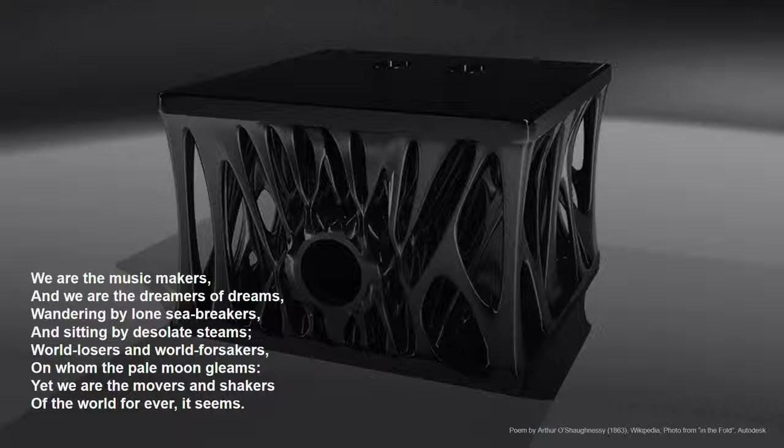Boom. And there was the quote that I like, okay? At the very end there. And people really don't know that there's an actual poem that's from. It's a poem from 1863. We are the music makers and we are the dreamers of dreams, wandering by lone sea breakers and sitting by desolate streams, world losers and world forsakers on whom the pale moon gleams, yet we are the movers and shakers of the world forever it seems. So I like to think of us as the movers and shakers of dreaming up designs and making designs for our companies or for our personal lives.

So moving from that, everybody's here for generative design, right? So what is generative design? If you just think about it, nature has been perfecting and adapting design for millions of years.

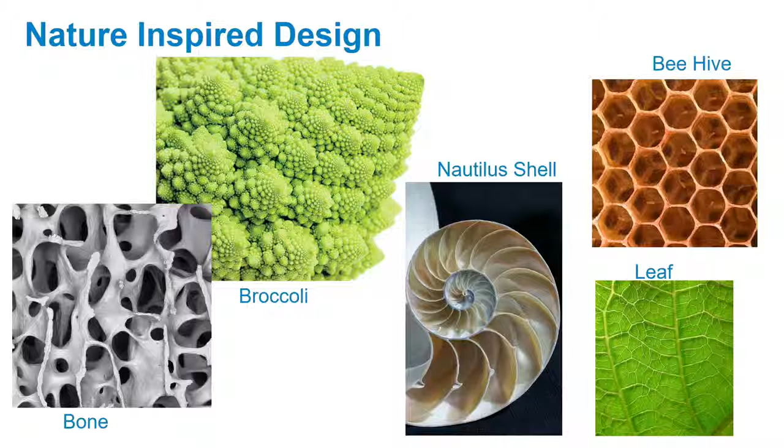So we can dream it. What if we could reference nature for the basis of our design? Generative design mimics nature's evolutionary approach to design. It's designed with a purpose. Just like nature has a purpose to build their items, we have a purpose to design and build. Next will come a little video that Autodesk put out last year, but we can take a look at it.

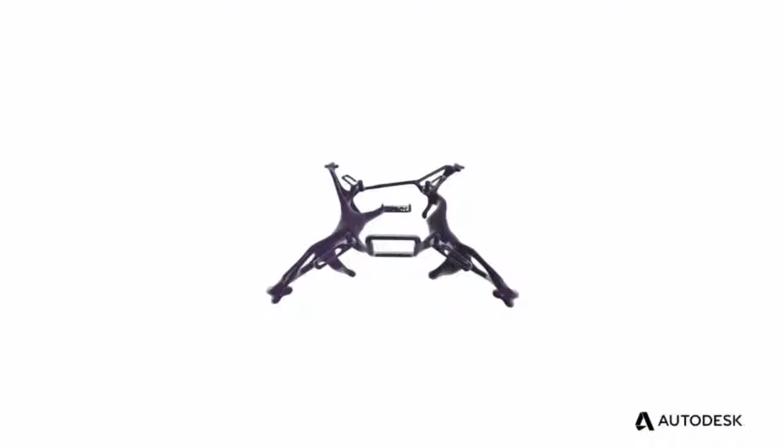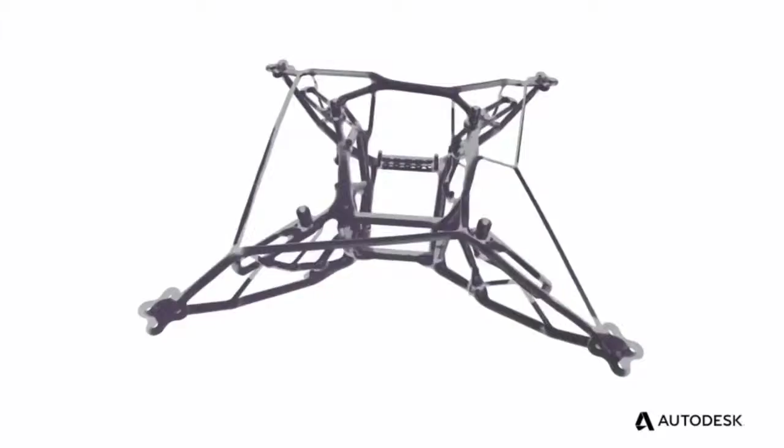What if you could come up with thousands of options for a single design without drawing, all of which meet specific goals set by the designer? And from those options, pick the one design that delivers on the most important criteria, the design you couldn't possibly have imagined. This is generative design, a technology that harnesses massive computing power, creating forms with precise amounts of material only where needed, achieving maximum performance while wasting nothing.

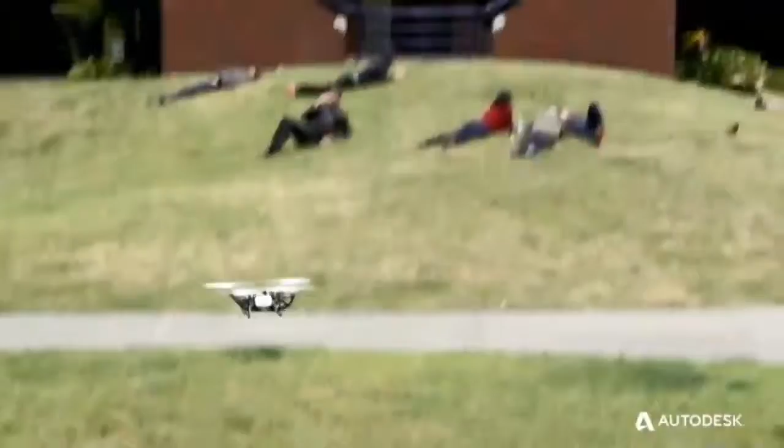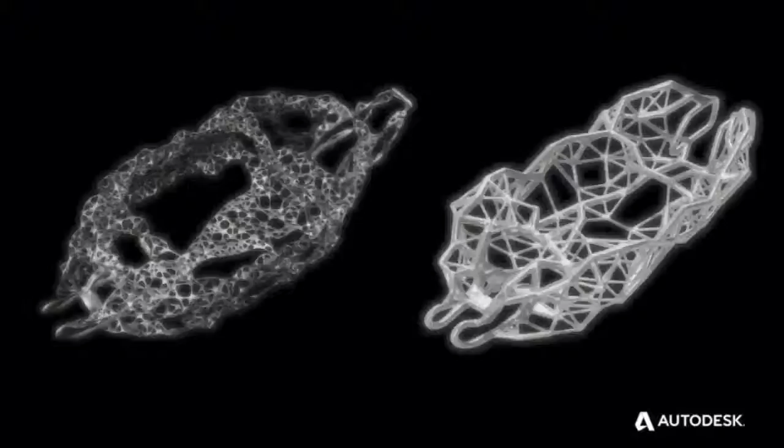But generative design can be about much more than simply turning out alternatives. Prototypes can be scanned and equipped with sensors that provide real-time performance data that can be looped back into the design process, so the object, in effect, co-designs itself. And depending on the material and method of manufacture chosen, the software can optimize the design for those choices. In its search for the optimal design, generative design creates complex forms that would otherwise be impossible to make using traditional manufacturing methods. Now with advancements in material science and the ability of 3D printers to print metal, companies like Airbus can create forms like this airplane partition panel that's half as light and just as strong. The result? Significant reduction in fuel costs and CO2 emissions.

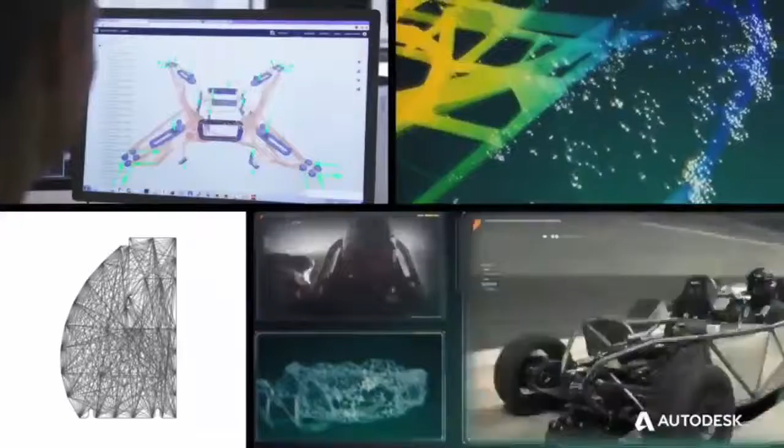The things that have limited us in the past, software, materials, manufacturing, no longer do so. With generative design, the world can look and perform any way we want it to. This is the next stage in the evolution of design, and it's happening now.

Now, when you look at that video and you hear it, it says half as light but just as strong, or it could even be stronger, just like bone material. We saw the bone structure close up there. It's really light, but yet it's really, really strong. Generative design is going to help us optimize and create designs that we can only dream about. A human being couldn't design that, but with nature's approach, with their algorithms, we can create designs that we can only dream about.

So everybody's here now for an instructional demo. I'm going to show you how easy it is, how simple it is to start your project, get some models in there, and then generate and create some outcomes. So we're going to get started with it. We're going to do the demo. We're going to load projects and models into the software. We're going to set loads and constraints. We're going to set objectives and see how simple it is, and we want you to use it and then give us some feedback about it.

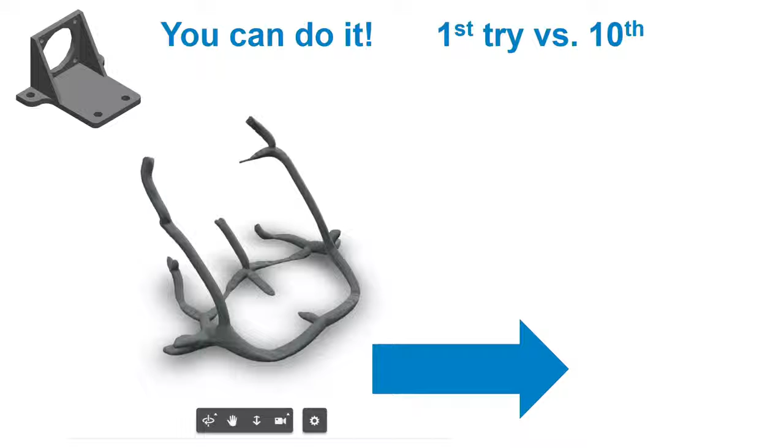So when I was starting out, I started with this bracket, NEMA bracket here, little motor bracket. And my first try putting this object into generative design, I get something like this. Don't laugh. Okay? Can I use that in production? I don't think so. It looks something like weird antlers or something. But I learned about the software. I tried more and more, and I got something on my 10th try that I could actually use. So going from the NEMA bracket up here down to something like this, if I created that in steel, I could get something just as strong, but half the material. Actually, it's more than half the material gone, and the weight also is down to about 30%.

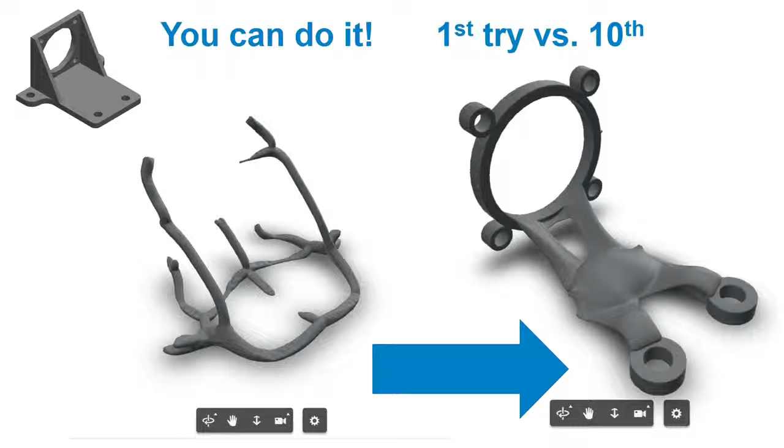So starting with Autodesk Generative Design, and if I say AGD, it's going to be a little bit simpler instead of saying Autodesk Generative Design all the time. All right, so just remember that, okay? So we're going to start the generative design, we're going to log into our account, and then select the hub and click our new project. So with that, we'll start the software. We're going to log in.

Okay. Now we're in the tool. Now we're going to go up to our profile button, and you can see that there's different hubs that you can select from. Different teams. Okay.

Now if I go over here to the new projects button, I can see the different generations I've done in that hub. Or I could go over here and switch hubs again and then see what I have in the other one. So you could create different projects for different teams, different hubs there. Okay, and you click the new project button and you're ready to go.

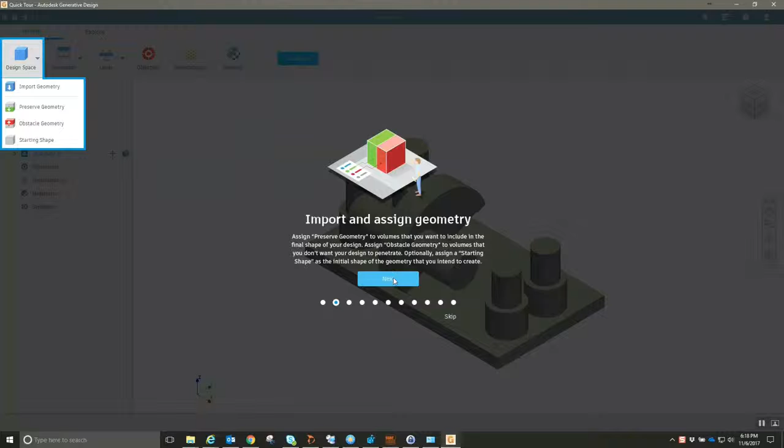Now with generative design, there is a user interface and workflow. And Autodesk recently in the Tech Preview 5 just put a new starting video in here to help you out. So once you first start it, it'll show you exactly what workflow you have to go through to get your generations and outcomes and see what you can do to filter and explore at the very end. Nice little addition they put in there.

Okay. There's a user interface, so there's right-click menus. There's different key combinations: control left click will add to selection, shift middle mouse rotates and control middle mouse will zoom. So it's really similar to CAD programs you have already, and it's pretty familiar. And you can also do the quick tour button if you ever have to look at it again. There's a quick tour button in the question mark icon top right.

There's also preferences in generative design. There's global unit preferences and project unit preferences. And the project units will only show up if you have a project started. So if you start the tool and you look in there, it's only going to show the global units. And the project units have priority over the global units.

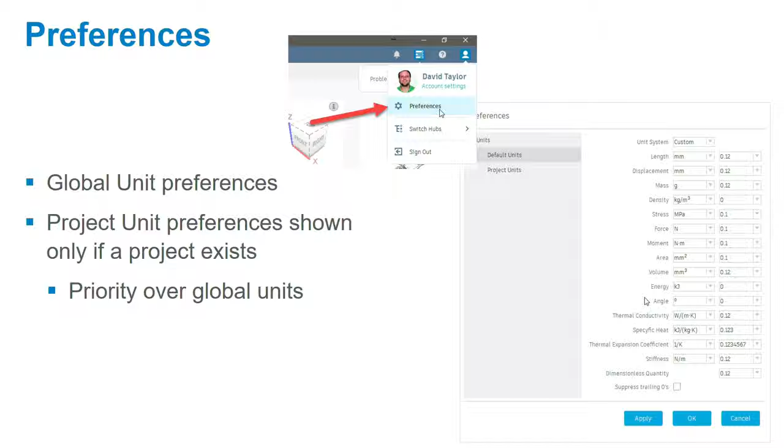And there's a clear workflow. So if you watch the video, there's a clear workflow from left to right, from importing your geometry and setting loads and constraints and objectives, then generating it. So here's the tool, and you can actually see some of the buttons and the workflow. All the way to generate.

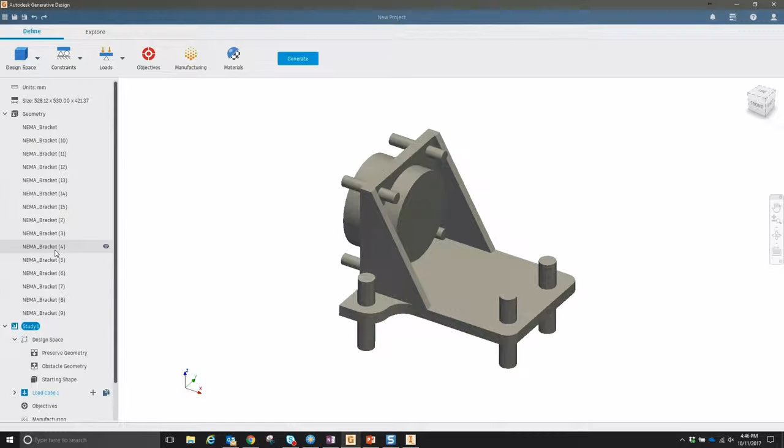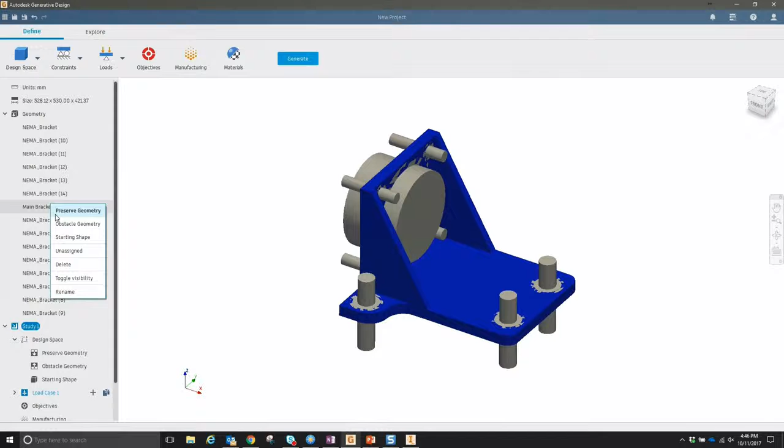And on the left-hand side, there's like a browser tree where you can look at all the parts that you have. You can select the parts. You can click on a little eyeball to toggle visibility. You can right-click also, like I said, the right-click menus to assign or toggle visibilities. You can also rename the imported CAD objects so that you know what they are. And there's the assigns. Okay.

Now there's a clear structure within AGD, the file structure here. You start out with the hub. Like I said, you could switch hubs or teams. And within that hub, there's a project. So you start out with a project, and then you assign a study and loads and objectives within that study. So just like here on the browser tree, just broken down here.

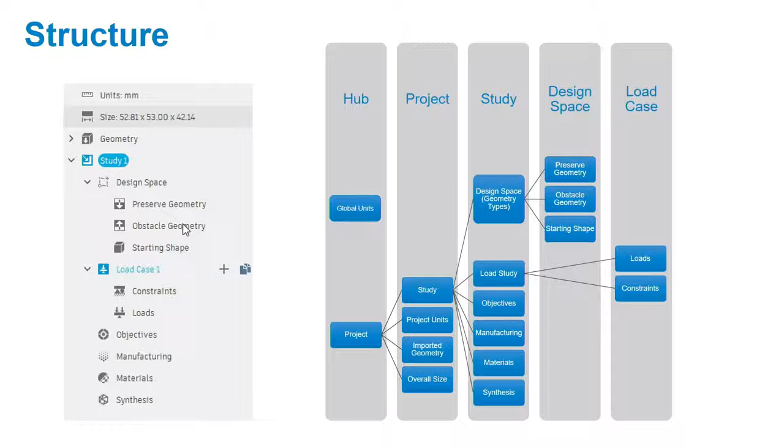Okay. So our first task in the AGD software is importing and assigning geometry. We need something to start out with. We can't just say, hey, push the button and create something, because it doesn't know what to do. So we have to import geometry. The supported formats for import are your mesh and standard formats, like your SAT files, your IGES files, STEP, STL files. I think they're the most used, maybe OBJ.

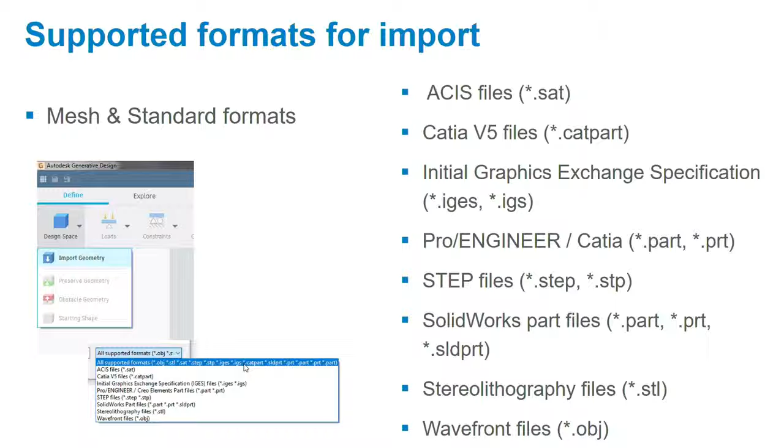And since I was using Inventor for a lot of exporting and importing these meshes into AGD, I found some key things: if you're using IGES or STEP or SAT files, when you export from Inventor, it won't include the mesh features. So you have to, in Inventor, create a solid body using like a Mesh Enabler add-in or something else. You've got to have that solid body to export from Inventor.

And then with the SATs, it will treat the bodies as one entity. So if you have multiple parts in your assembly, it will just come in as one singular part. It won't let you select different parts, different bodies. And with OBJ and STLs, when you export from Inventor and import into AGD, it won't show you the little geometries that are inside the other bodies. So they're just some tips that I have found from working in Inventor and with AGD.

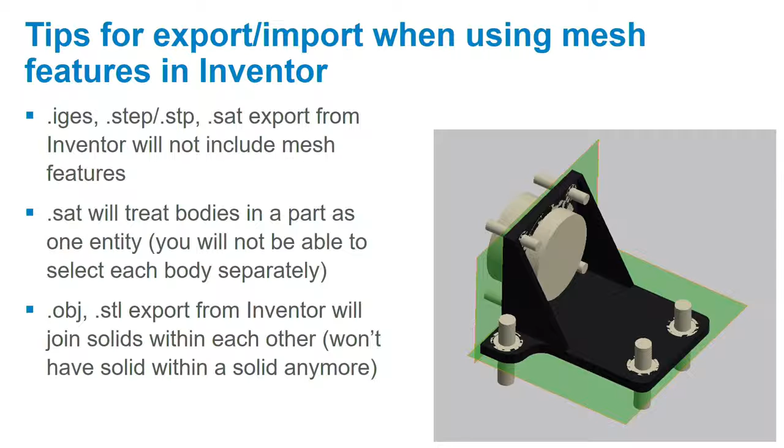So right now, it will show here how to import and what happens. So I'm going to import the motor bracket. It asks me for units. You can select the units there.

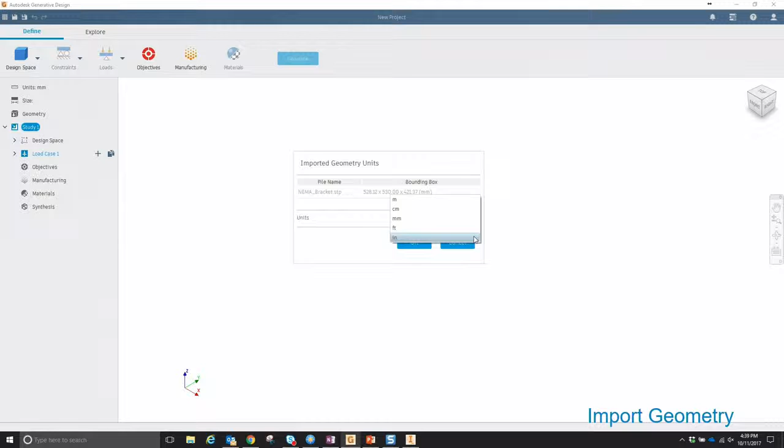And it imports as the separate bodies here from the assembly from Inventor, which I chose there. Okay. And when we're assigning geometry, it's giving instruction to the application. So it doesn't really know what to do after you put the geometry in there, so we have to assign some things to it. So with the preserved geometry, it will keep the geometry the same as what is designed. So if you select a part as preserved geometry, it will keep that for the outcome also, the same exact

shape. The obstacle geometry creates like a barrier. So you're going to have obstacles within the design that the generative design software is going to build around and butt up against, but not go through. And then we got starting shapes, which is the part or the geometry that we want generative design to modify, to build, to recreate. So there's 3 different types of geometries you can assign, and it tells the software and the algorithms what to do.

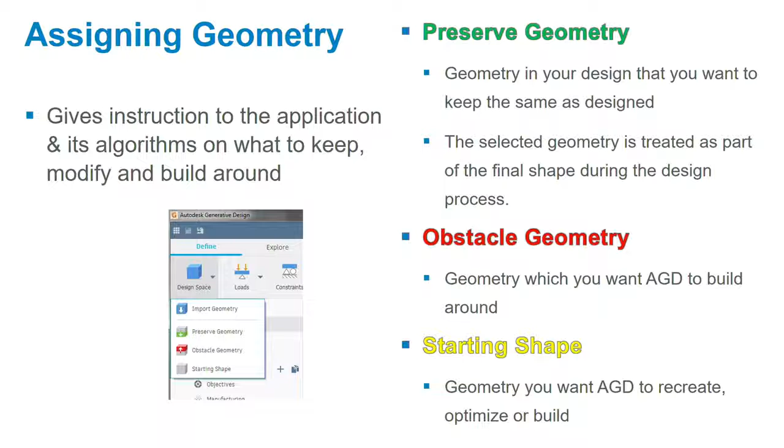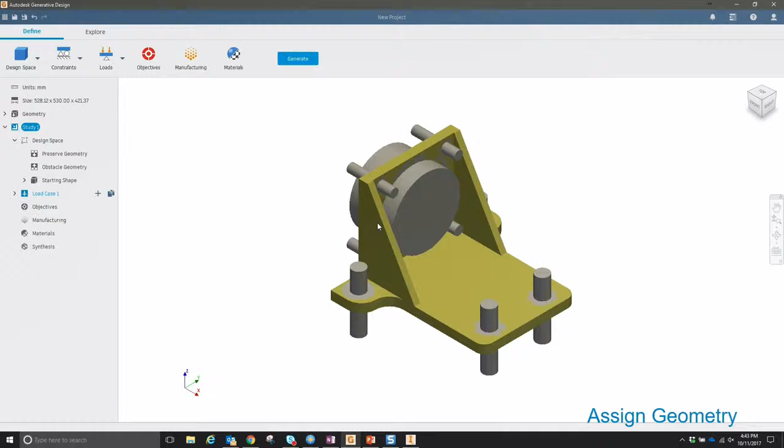So you can see here in this, we're going to assign some geometry. So we got the preserve, obstacle, and starting shape. So I'm going to assign a starting shape. I want that bracket part, that full part there, to be recreated by the software. And now I'm going to assign an obstacle geometry. So with the holes that I wanted the motor or the bolts to come through, I had to create these extra bodies. And I'm assigning those now as obstacles so that the software won't make anything through those holes.

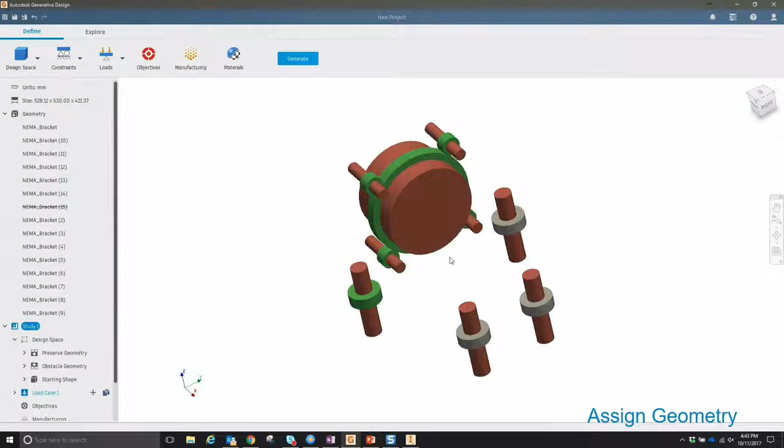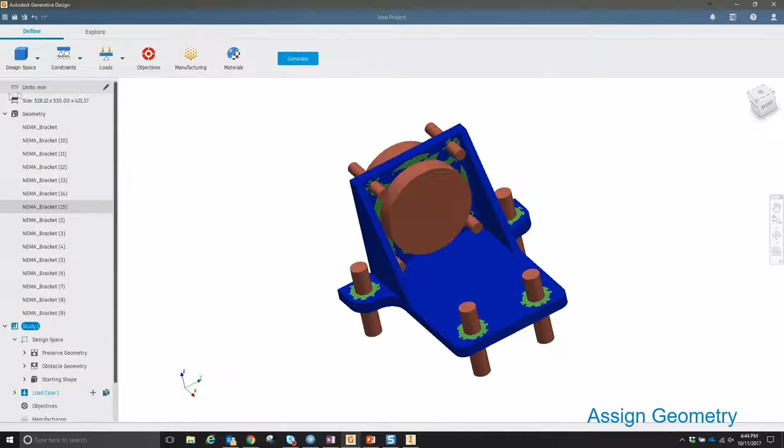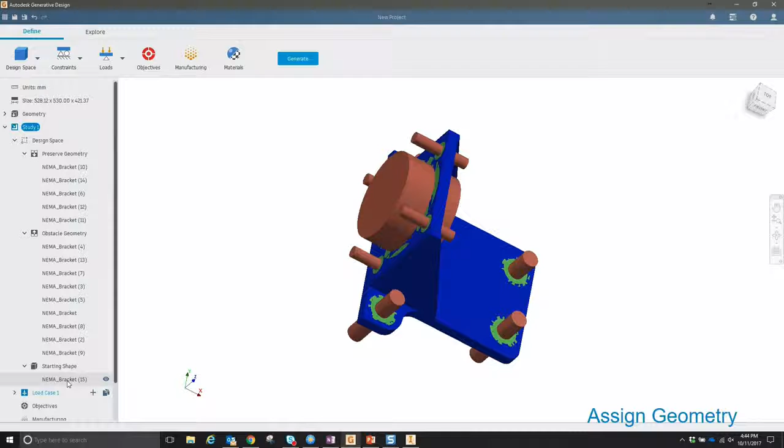And now I'm turning off that full starting shape so that I can see everything underneath and inside. And with these, I want to create the rings where the motor goes through. That's my preserved geometry, and it will actually keep those rings in my final shape. Okay, and you can see they change different colors just to denote the different types of geometry that you assigned. And over on the left-hand side, in the browser here, you can see the different geometry that's assigned to the different types.

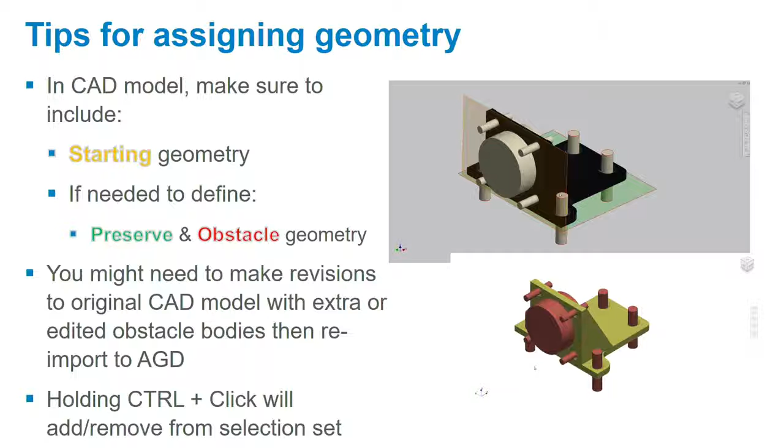Okay, some tips for assigning geometry. When you export your CAD model, you got to make sure you include your starting geometry, of course, the thing that you want AGD to recreate. And sometimes you need to define preserve and obstacle geometry from your original CAD software. So like in Inventor, I had to go and create these extra obstacle geometries and preserved geometries for the software to keep or to build around. And like I said, you might need to do some outcomes, go back, redo it in CAD, and then export and try it again. The AGD software is really quick at creating outcomes, so it's pretty simple to do. Okay.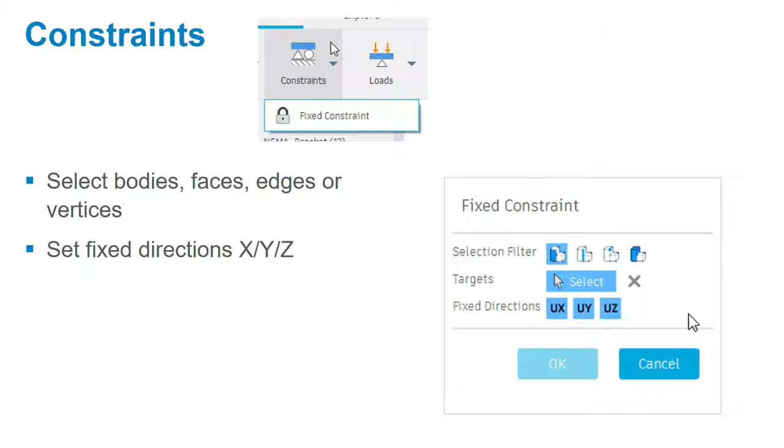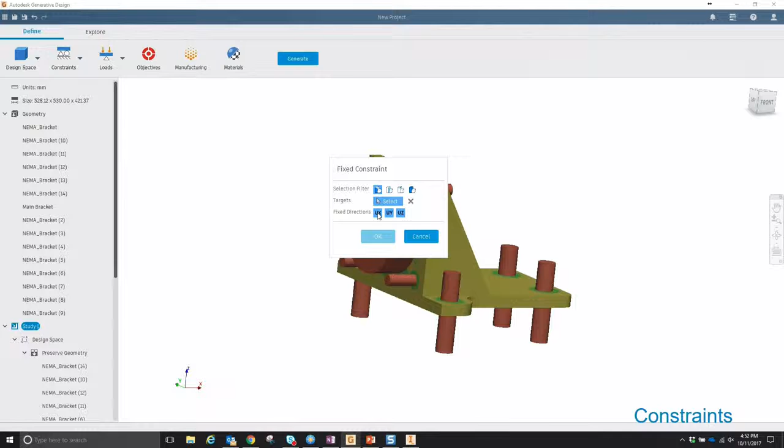So after we imported the geometry and assigned the different types, we have to set constraints up for it. And with this, we can do a fixed constraint, where we can select bodies, faces, edges, or vertices. And we can set fixed directions of X, Y, Z if we wanted to. We can click those off and on if we want. And here you can see I'm going to assign a constraint. And there's all the different types of constraints you can assign to the different bodies. And I'll select the body. And now I actually set the constraint around the motor, because I wanted that to stay where it was, and also on the bolt holes.

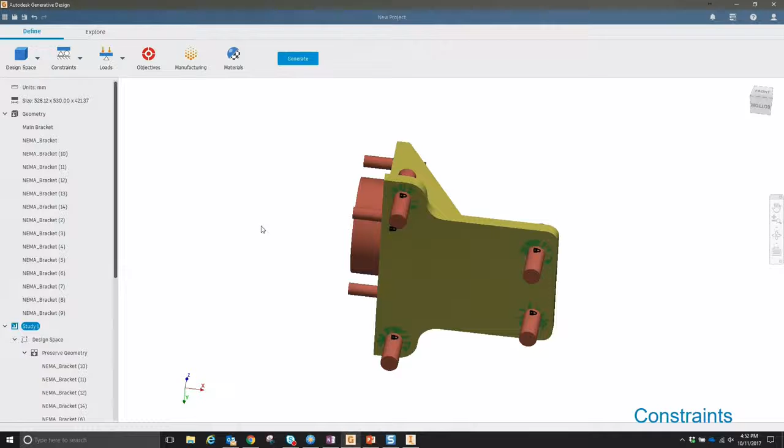Okay. So after we have constraints, we need to set up loads because we go through our workflow left to right. So we go constraints, now loads. And there are three different load types. There's a pressure load, a force load, and a moment load. So I like to think of these as squeeze, push, and twist. Okay. And we can apply these to selected entities. So depending on the load being used, you can set them to faces, edges, vertices, or

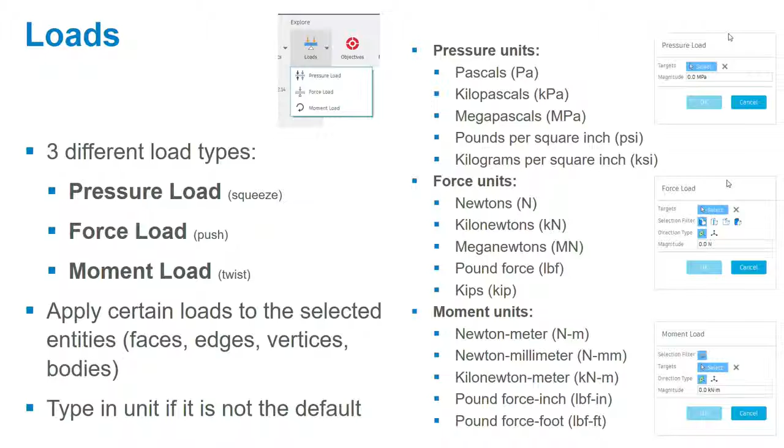bodies. And also, with the project units and the global units, if you can see in these little boxes over here, if it comes up as newtons or pound force, you can actually type in the different type of unit in there. Just type it in manually, and it will convert it automatically for you. So right now I'm going to set a load. I'm going to do my force load.

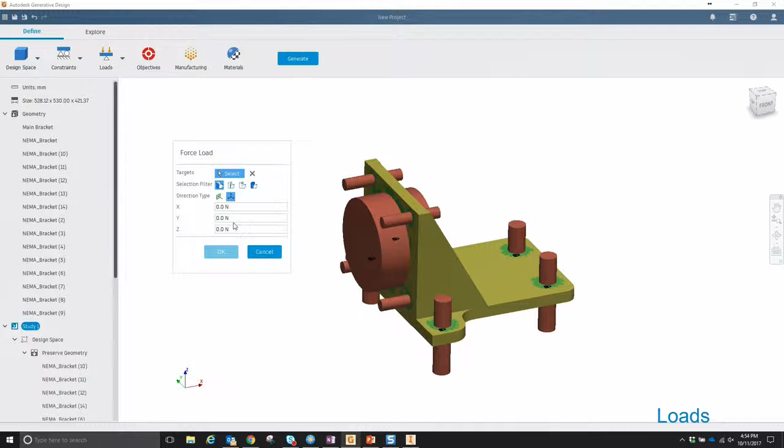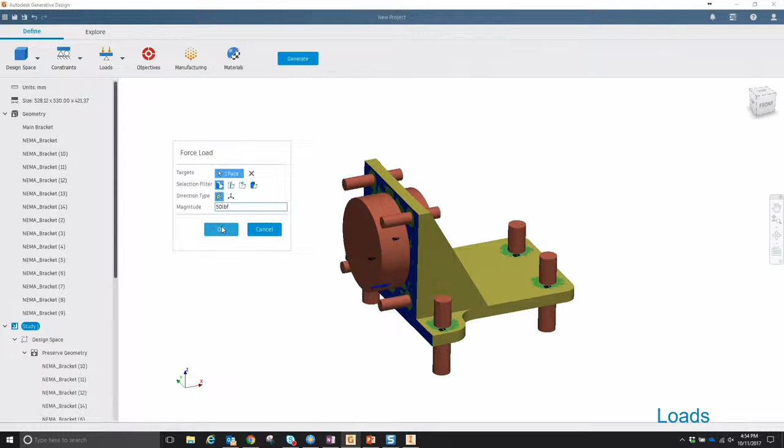Left click is just to select it, then you can do control click to add or remove. For these? Oh, yeah. It would be face, edge, vertex, or body. Yeah. And you can see I actually put in pound-force, LBF, instead of newtons, so I didn't need to convert it. I just typed it in and it did it for me. So I'm going to now add a force onto this bottom part here.

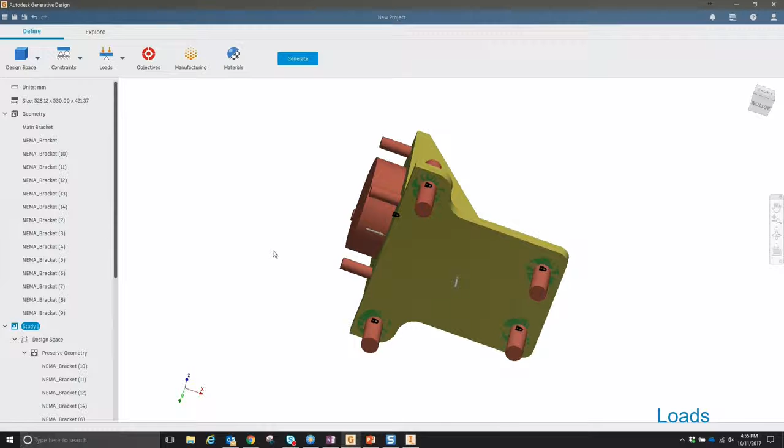Okay, now I've got my loads on there. So now I've got my geometry, my constraints, my loads, and you can see that the loads show up here in the browser also. So as we work this way, it's also building everything on the left-hand side here. So there's multiple ways of doing this, as you can see as you work with the tool.

Now we've got objectives, the next button over. Objectives are the thing that you want to achieve from your design. You've got minimize mass. With that, you can specify your safety factors, and it will make it the lightest weight possible within that range. You can also set a mass target. So that's like I want it 30% difference from my original design. I can set that, and it will go within the safety factor that you create.

And then also you can maximize stiffness. So you specify the safety factor, and it gives an optimum rigidity to weight ratio. And with maximize stiffness, you can actually create another objective too. So you can have two different ones going at the same time.

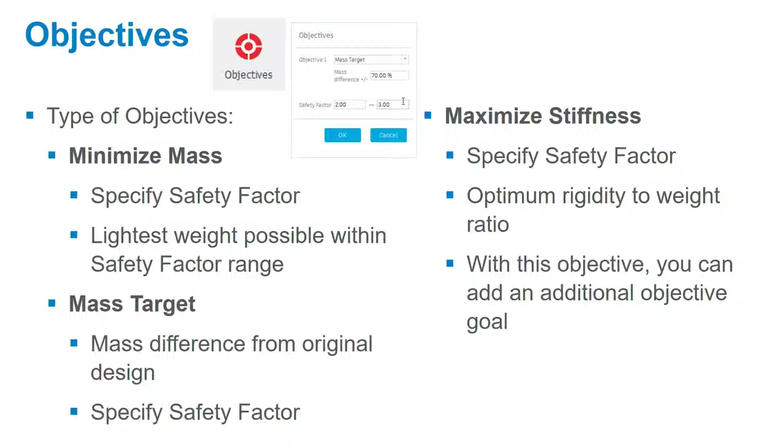Okay. Now, next button over would be manufacturing. Manufacturing is the way that the object is going to be created. So you can do unrestricted, which means any type of manufacturing: 3D printing, casting, whatever you want. Then there's an additive selection also. So if I just want additive manufacturing, I'll click on that and say I want to do a 3D printed object, and it will actually optimize the design for additive manufacturing.

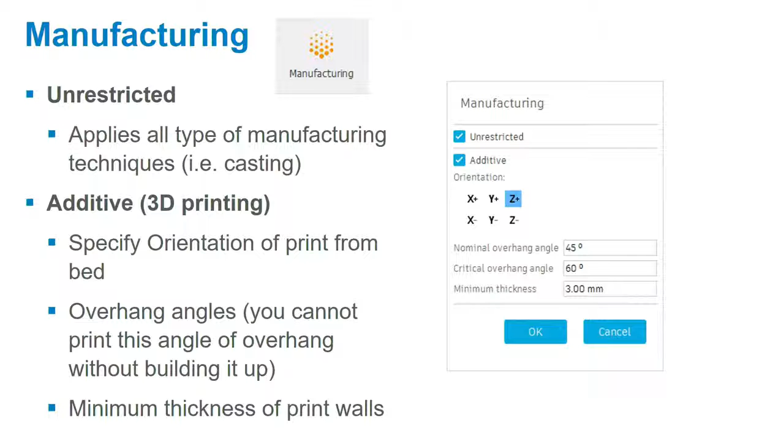Next one over is materials. With materials, you can select a maximum of 5 materials. There's a materials box that pops up when you click the button, and if there's a little red dot there, you can download more. Every week or every couple weeks, more are added to the software, so it's pretty quick. And you can click on each material and see its specifications, so if you don't know the strengths or the weights, you can look at that.

And one note too, custom materials cannot be added yet, right? Not yet. Okay. A lot of people ask for that, but we'll see.

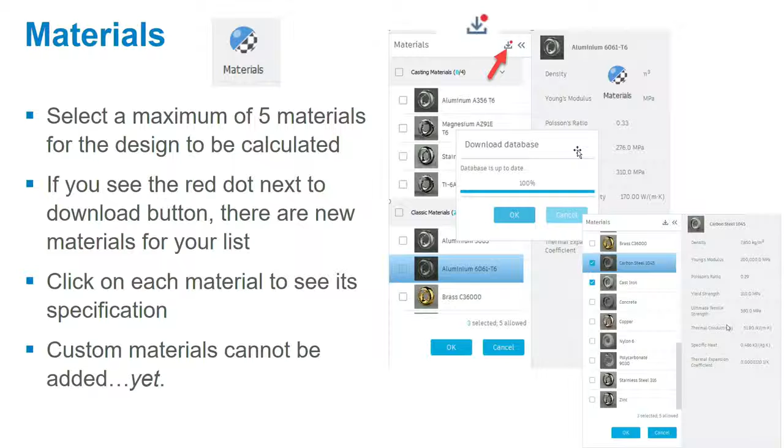So here's the material box, and you can see I'm now downloading new materials from the cloud. It's adding them directly to the pop-up. Then I can select those too if I wanted to. So it's as simple as that. Really quick and easy. And I'm just scrolling down through all the materials that we have available within AGD to use.

Okay. Now there's a part at the bottom of the browser tree called synthesis, which is about what topology you have at the end of your outcomes. It gives you 3 options. You can have a coarse topology, which reduces generation time and gives you a quick outcome, but it's the least accurate, just like a draft. Then there's a normal selection, which optimizes the outcomes along the spectrum. And accurate is the best quality and desired for manufacturing.

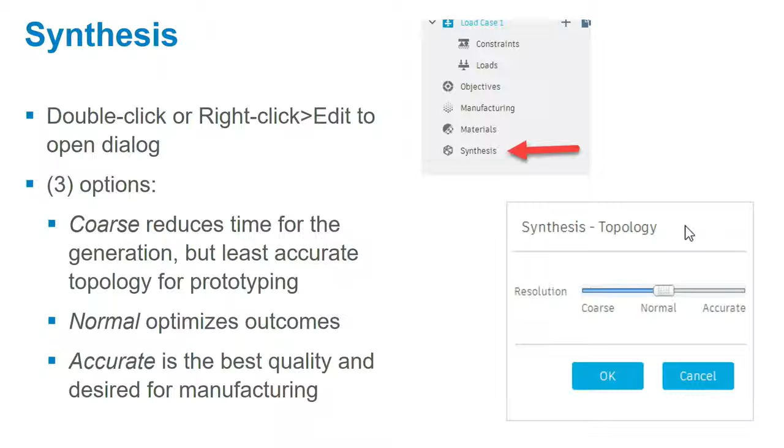Once you hit generate, it will show you a number of outcomes. If you have a lot, I would go with coarse just to see how quick it goes and see what you get on the output. Once you have something you want to use, then you can go with accurate. And once we have those set up, we can go ahead and generate the job.

With generation, the data is checked first, and errors get shown. If you have a little red icon next to an item on the browser tree, you have to go fix that, whether a load is off or a constraint is off. You can roll over the icon and it will tell you what's wrong. And once you hit the generate button, any cloud or other messages are returned in another little pop-up button there.

Next to the pop-up button, there's a little status icon that gives you the generation status: uploading the file, going through it, and you can also cancel if you need to stop something and go back and resend it.

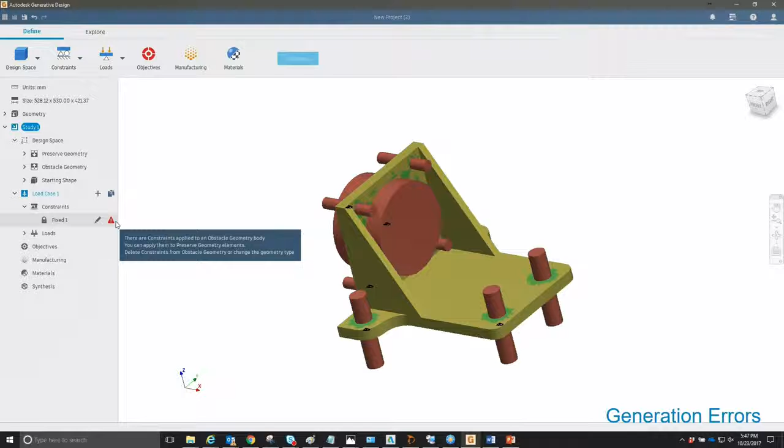So you can see here, I'm going to try generating something. It checked, and now I have a little red icon there, so I needed to fix something, and it tells me exactly what. My first couple runs, I had a bunch of these because I didn't set things up right, so I was trying to work things out and get it clean.

If your data and specifications are good, the pop-up comes up looking something like this, telling you how many outcomes you're going to have. The more materials and manufacturing constraints you add, and the synthesis resolution, determine the outcome number. After you click generate and hit continue, it uploads your study data to the AGD cloud, and then the magic begins.

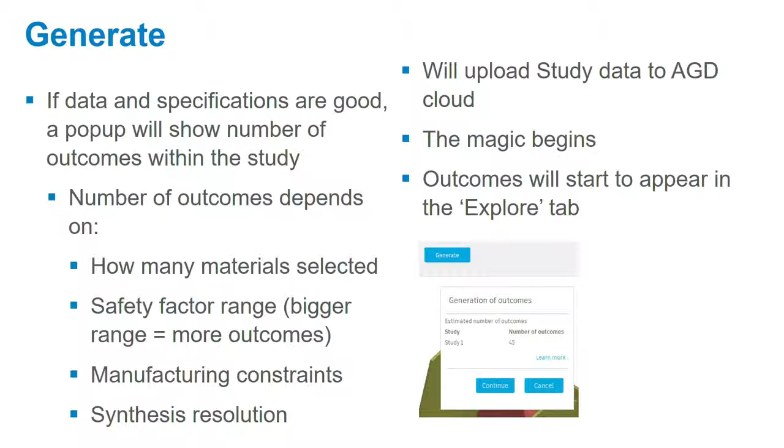So you can see here there's a clean generation. Once I hit generate, it comes up with the pop-up window, and it tells me how many outcomes I have right away. I hit continue, and now it's starting to upload and generate my designs.

Can you explain when you had to put a body constraint on the part of the geometry that you didn't want to have changed at all? Yeah, so like the hole where it was bolted in, I didn't want those to move, and I wanted to keep them as the same pattern, pretty much. So I put constraints on those so the software wouldn't move those around. So even though they're identified as don't move them, they're just like the geometry stuff with constraints. Yeah.

And here you can see now that the outcomes start to pop up in your Explore tab here. Okay. Now, some results after that. We have outcome filters within the results. We can filter by status, we can filter by studies and objective ranges. So we can drag these around just like sliders and get our ranges for mass and volume.

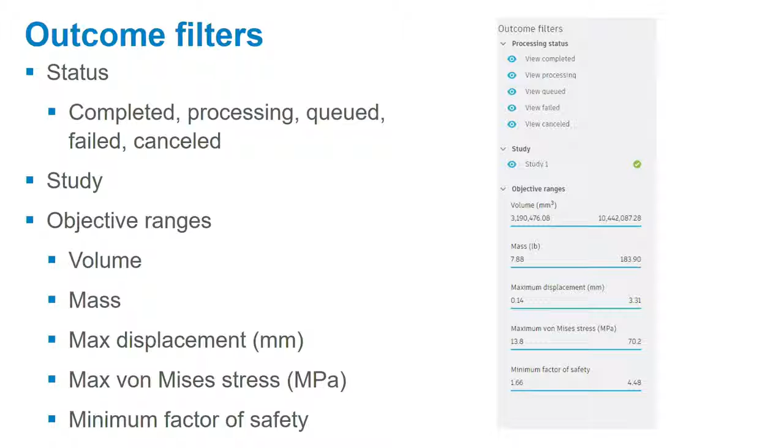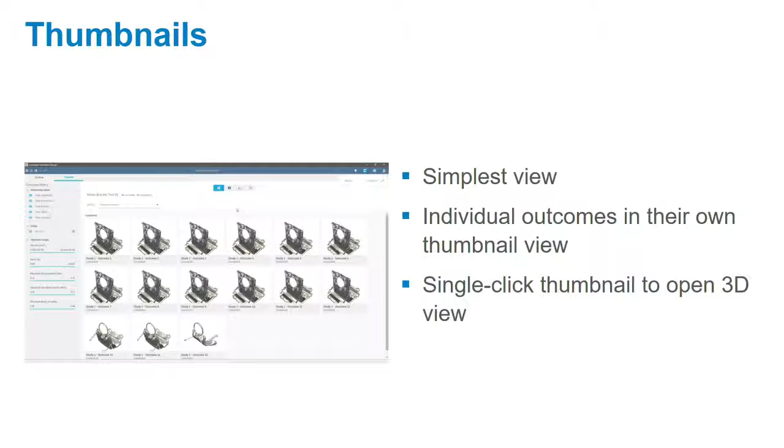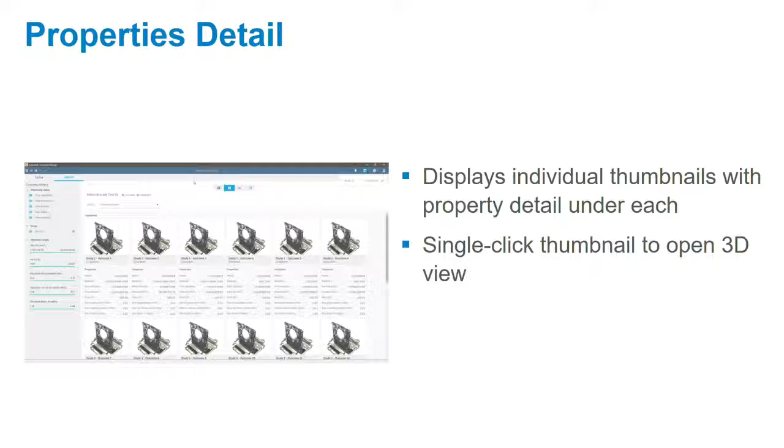And there's different types of views within the Explore tab. There's a thumbnails view, which gives you just thumbnails of all the outcomes. That's the simplest view. There's a properties view that will give you all the different types of property details underneath the thumbnails. There's a scatter plot, which is a nice view, so you can set it up by status, whether it's done or not, or you can set up different criteria on the table, up and down, left and right, and you can see where they lie on the scatter plot. And there's also a table, so you can sort and filter out that way too.

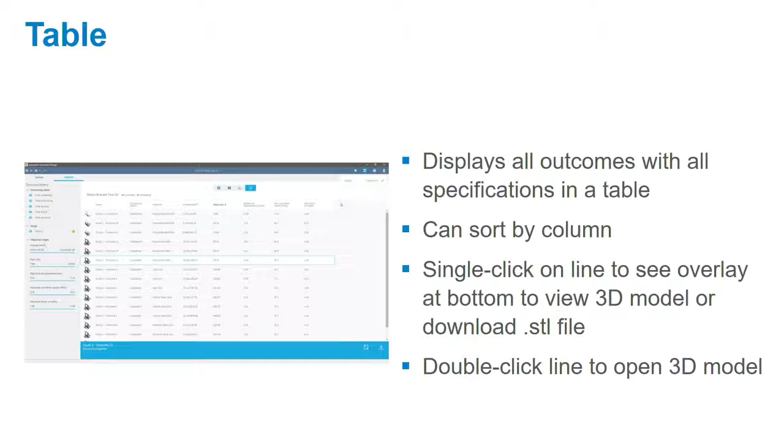So with the views then, we can see here in the Explore tab, we've got the filters on the left-hand side, and we can view by our processing status. So as it's going, we can take a look at what's done, what's still going, what's failed. And there's our drag there on the filters, that we can sort and filter that way. And we can also filter them and sort by the drop down there.

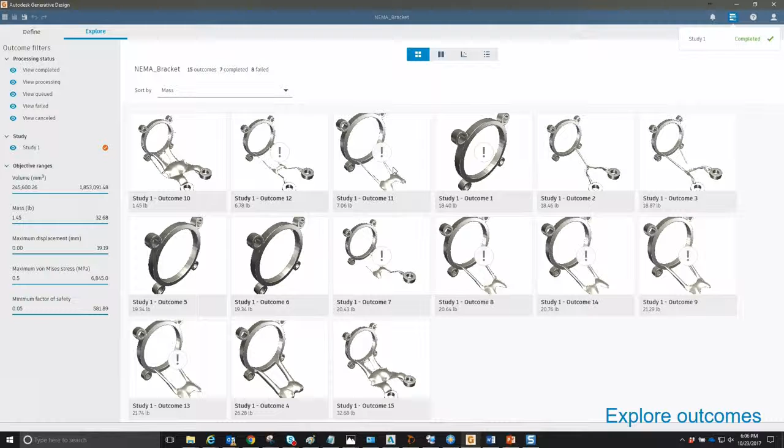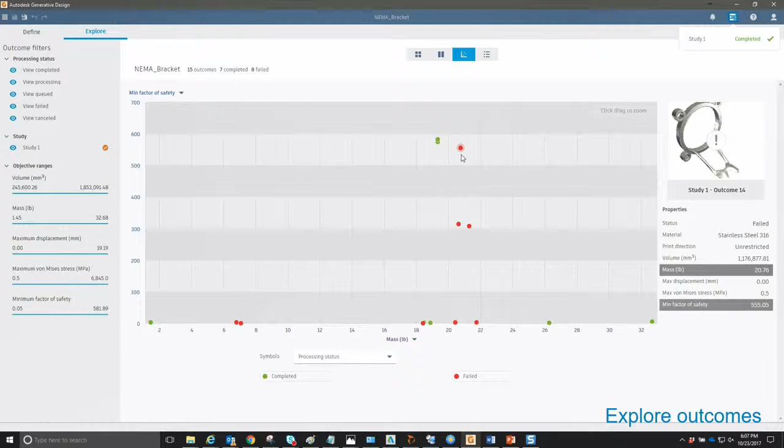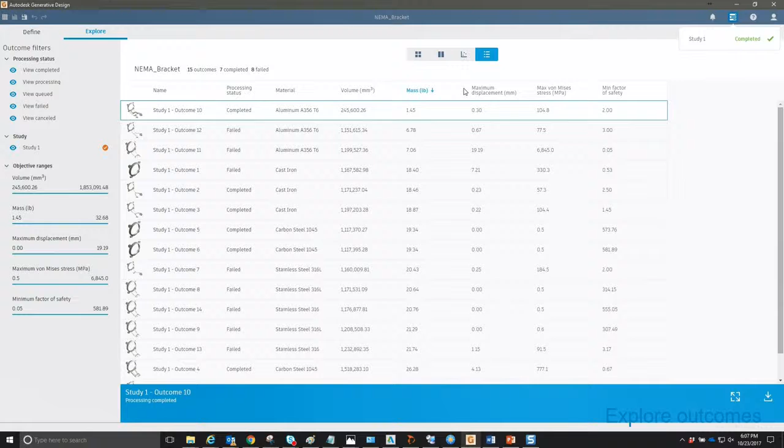And there's our icons for the different types of views. So if you click through those, there's our properties detail, and there's the details underneath. And here's our scatter plot, and as you roll over each one, it shows us the design, and also it shows us the information on the right-hand side. And once I click on one, then I can see that information. And here's our table view. Just like in an Excel sheet or other tables that you're familiar with, you can sort by the columns.

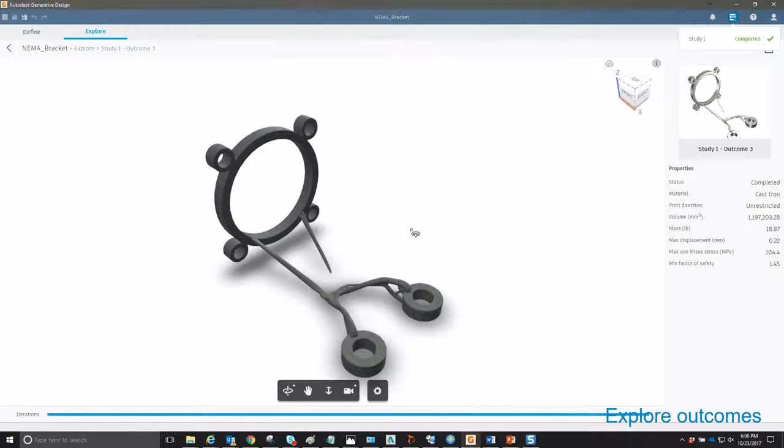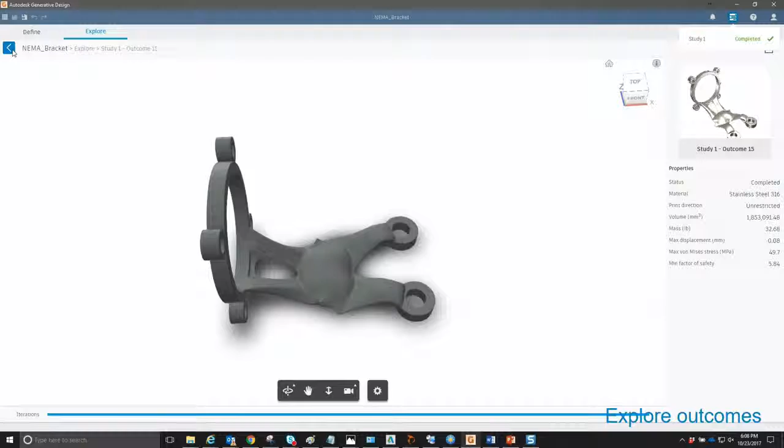If I were to double click on one of the parts, I can actually open it up in a 3D view and rotate it around and take a look at it. I'm thinking the software didn't need those holes for the structure because of the strength; it just needed those back holes with the forces that I put on it. Was this generated in the accurate setting or the normal setting? The normal setting, yeah. Okay.

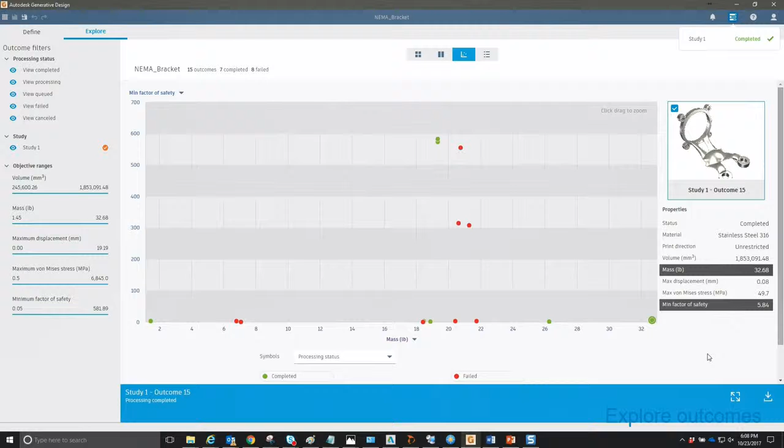Failed is if the geometry disappears, right? Yeah. There's many reasons for failure. We're just kind of iterating on how people want to solve it. But anytime structures become disconnected, like a disconnected pattern, that can be classified as failure. So we have to mark that and tag it and show you. Or sometimes the solver will time out if it's trying to iterate on something that is spinning out of control. I won't call it out of control, but it's just waiting too long. And so that'll fail too, and it'll get kicked out, and it'll warn you. So we're on the back end trying to figure out how to balance all these things, so we make sure we do the best. Okay.

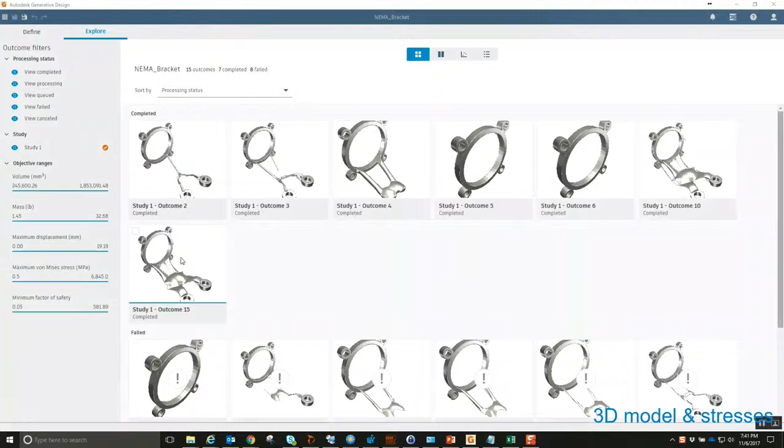And here, opening up, in the newest tech preview, they show you the stresses on the object. So you can take a look at that, and you can turn those off using the button here.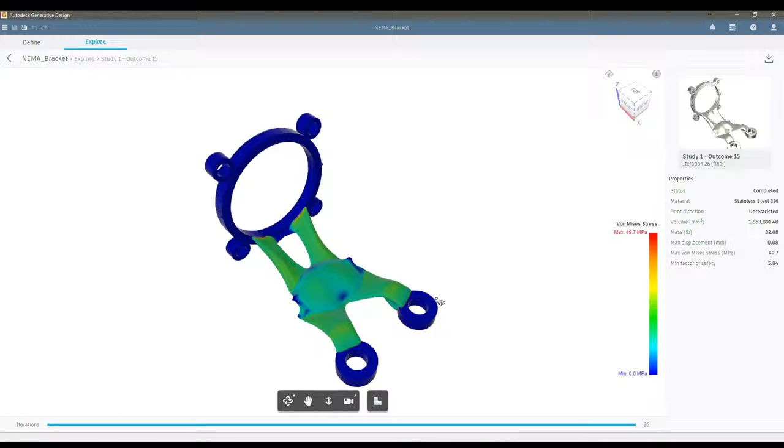Okay. So you can see stresses, and then also in the newest tech preview, you can sort by materials or have a scatter plot of materials, so you can drop that down and see what types of materials they are on the plot.

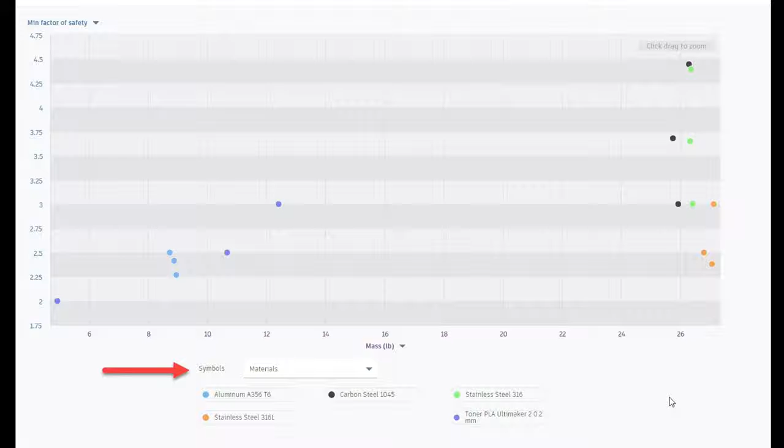So with the example I just showed, with steel material, I had my original part, which was heavier and had more material used. And my stress factor on some of the points was doubled compared to this part here. And this part had a higher safety factor, 39% of the mass compared to the original part. And it had fewer areas of high stress, and in those areas it was considerably less stress.

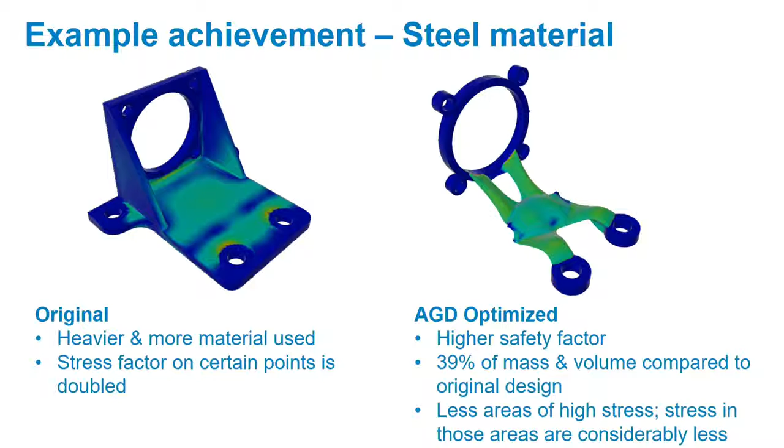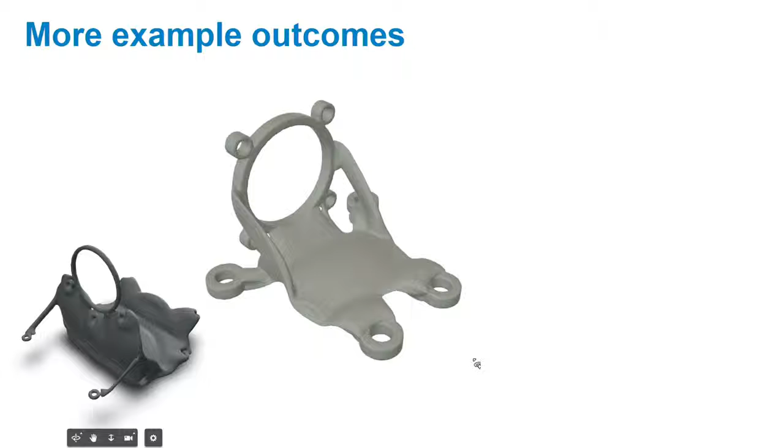So I had more example outcomes. These are just things I tried putting through and testing within the software. They might look a little strange. Here's a motor bracket that's supposed to hold the gear guard. This is one of the other results for additive manufacturing from that NEMA bracket. And this was a roller I tried doing with the loads and constraints within AGD, building it almost like bone structure that would hold up the other rollers that sat on top of it.

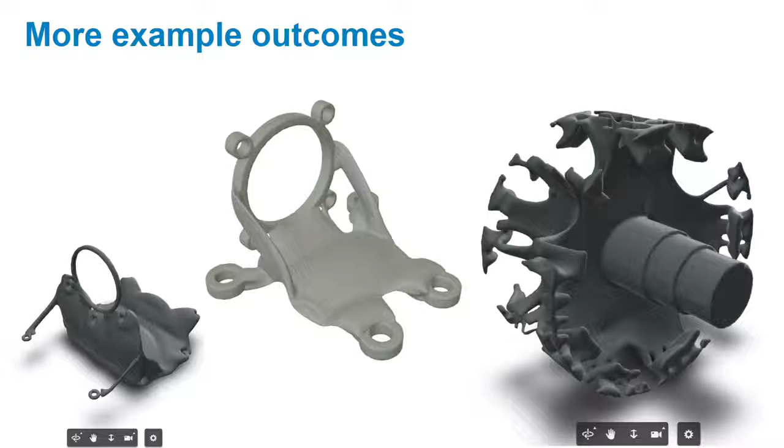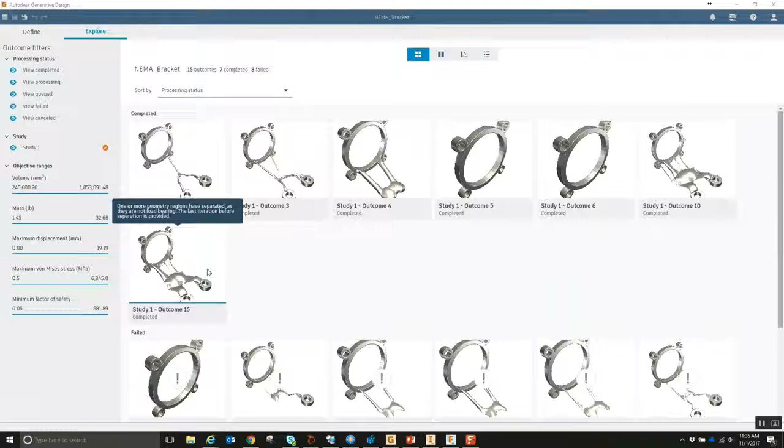So after we have an outcome, we can pick that and export it to other CAD, like back to Inventor or to another CAD software. So what we would do is pick the outcome we want. And with that, you can take this little drag down here and go back iterations, because the software will iterate the design as it generates. I can go back to different iterations and view those.

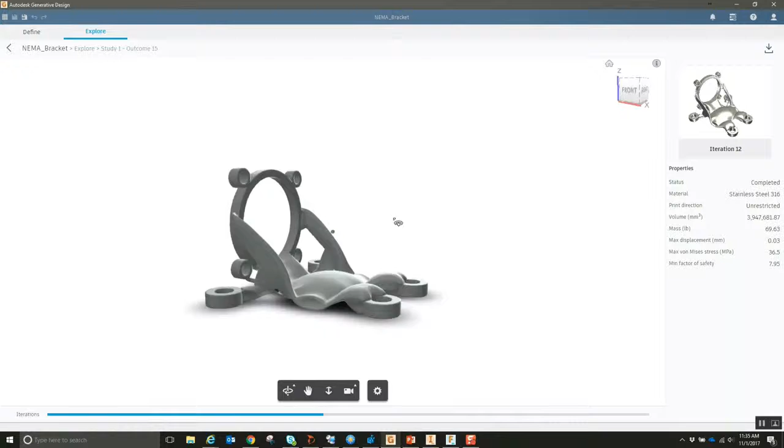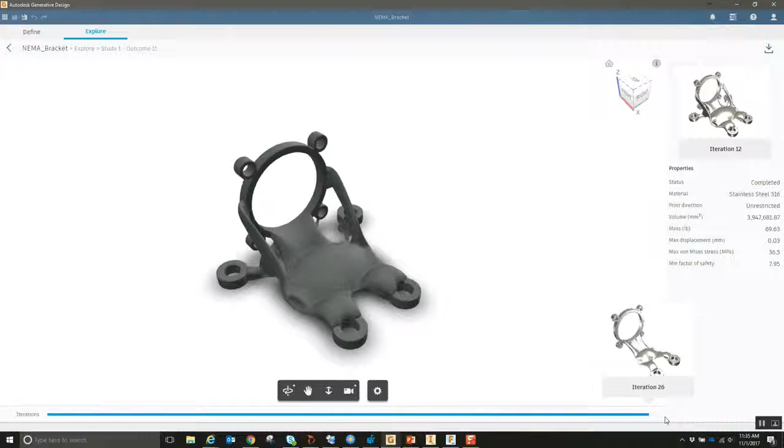I can then click that little button at the top right-hand corner, and I can export it as an STL file, or use it in another CAD application. Then I can also go to a different iteration and do the same thing, and save that one also. So I can save those separate ones, and open them up. This is Inventor. I can open that up in Inventor and use that for design.

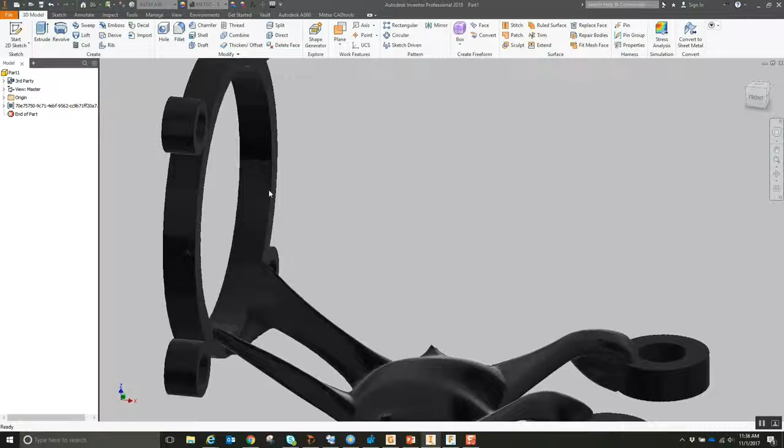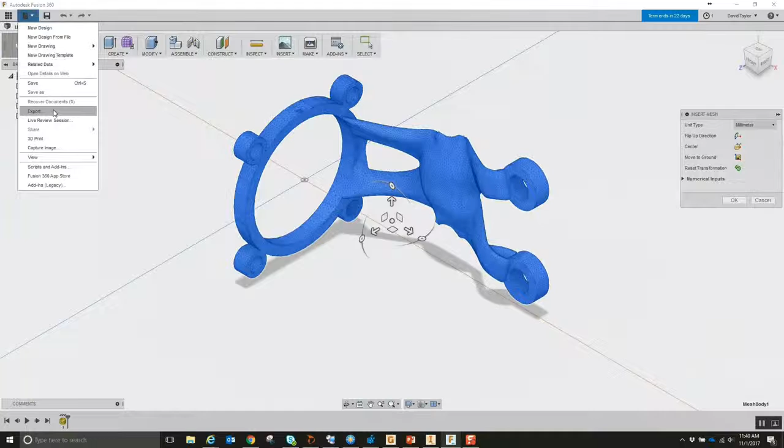Or with Fusion. I can find the object, open it up, and use that as a design. Then from Fusion, I can export that as different file formats also, if I don't want STL necessarily. Okay.

And then there's some further learning and help within the AGD software. There's that question mark icon, and that's got some online help. There's a link there. There's also the Autodesk feedback community forums. You could go and check those out.

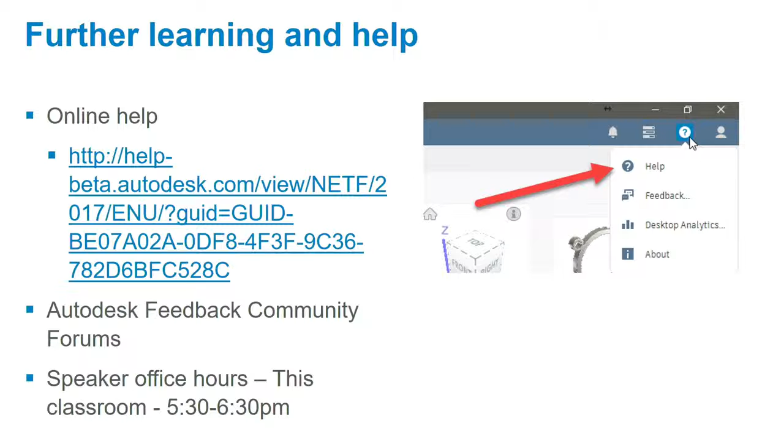And there's another question: where can I get it? Well, the Idea Exchange. You can sign up through the website, Autodesk IDX, or it's across from the exhibit hall. You can sign up for one of the Autodesk generative design sessions, and then you can get a tech preview. And there's David here, who is the person to talk to if you want to sign up for that. You just meet one-on-one with the Idea Exchange, it's about 20 minutes or so to talk, and you'll get an invitation to the preview.

And now with that, you have the golden ticket to start your own projects, start your own products. And if you saw down on the casino floor, they had the Willy Wonka stuff too, so I thought that was pretty neat, sticking with the theme.

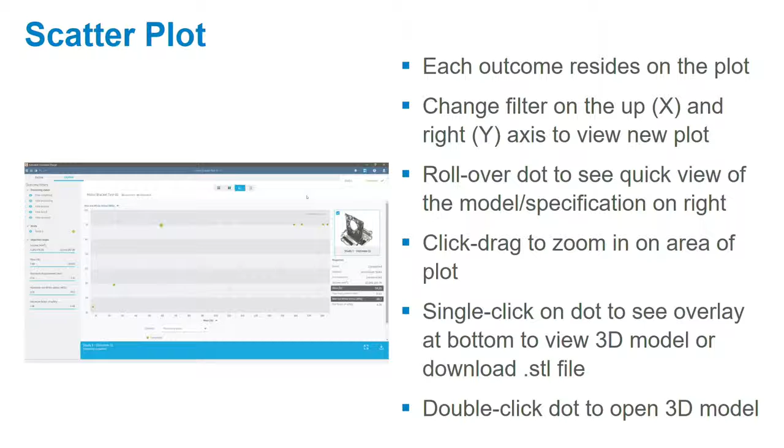Yes. Is there a way to instruct it to follow a line of symmetry so that you don't have parts that are unmeasurable in drawing? Short of cutting a part in half, putting a plane, cutting all your values in half, and then just mirroring it. Is there anything around that? We're working on it right now. That's going to be an answer to a lot of your questions. That's fair. Yeah, I think that's been a big question.

Do you guys have any way to, I know you can't tell us what the cost would be to make it, but model manufacturing costs, so you can sort those by difficulty to manufacture? We're working on that right now. It's a new tool. One comment on that one: that is probably the largest driver for selecting something that comes out of the project, right? So we definitely want to be able to plot that on the scatter plot to show you what the relative costs of each of those would be. Because as you can imagine, when you go from a standard... Totally get it.

Any other questions? Yes, David, I have a question. Great presentation, by the way. You mentioned there were 10 trial and error attempts to go from your first project to what we saw just now. Some of it seemed like it could have been tech preview bugs or issues, but I'm wondering what might be included in the learning experience to reduce the number of iterations to yield the results that you were looking for.